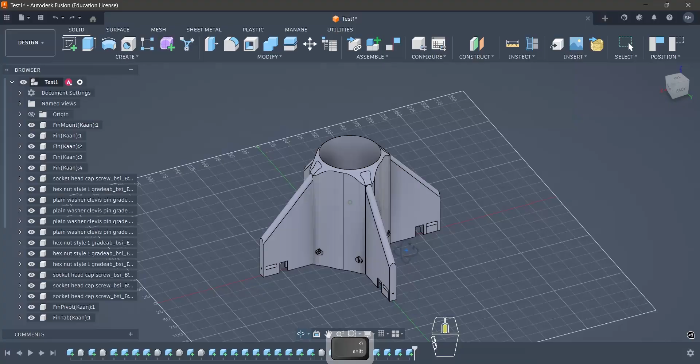Welcome to the first video in a beginner tutorial series where I cover how to design parts in Fusion 360 used for model rocketry. In this first video, I'll cover the basics of navigating around Fusion 360 by replicating the model fin can as shown below.

So this was originally made in SolidWorks and then imported into Fusion 360. There's lots of value in covering assembly from scratch, because this requires a lot of tools beyond extrude and revolve. I'll also include my keystrokes to show the use of hotkeys, which greatly speed up the CAD process, and I highly encourage everyone to learn it.

So this fin can has detachable fins with a dovetail slot, and at the rear these M4 bolts hold the fin can. The fin tabs also exist in the model, but we won't be modeling them. This is not a recommendation to build rocket fin cans this way. This is just a CAD piece used for education.

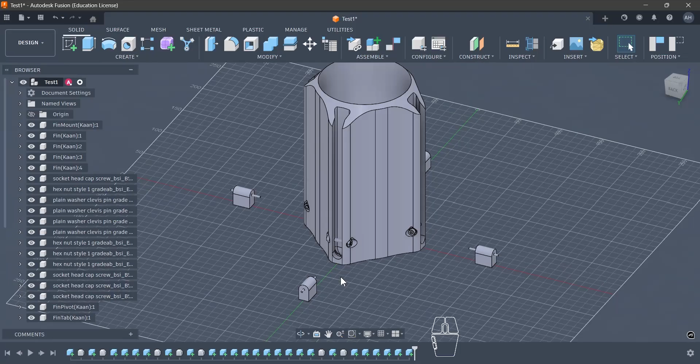So if you want to upload this to your own files, press File, Upload, and select Files, and you can click on the step file. I've already done that, so I won't be doing that again.

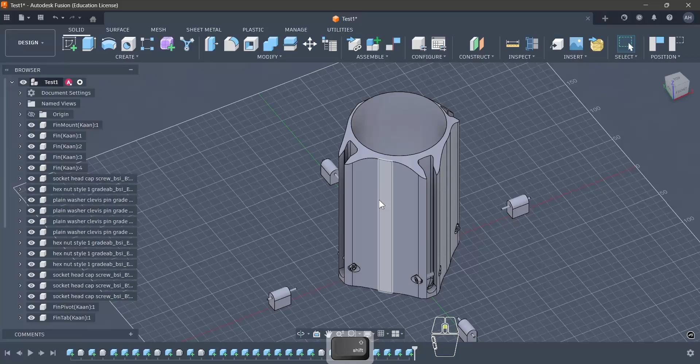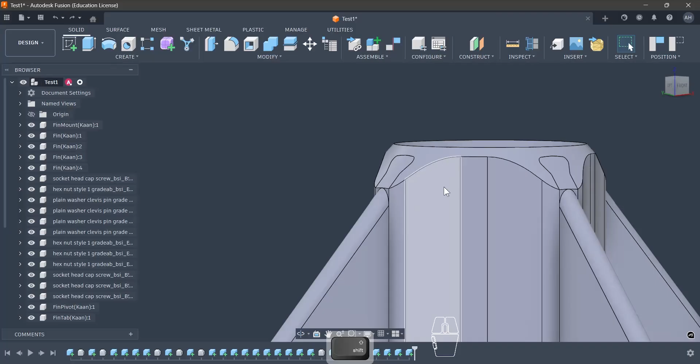So I believe that it's better to model the main part first, followed by the fins. So what are we seeing from this feature here? There's going to be mostly the same cross-section throughout, so the majority of this will come from an extrude, except for parts at the bottom, as seen here, as well as this top surface, which is a revolve cut all the way around the top, but it also needs to fit this shape of the fins. So how are we going to do that?

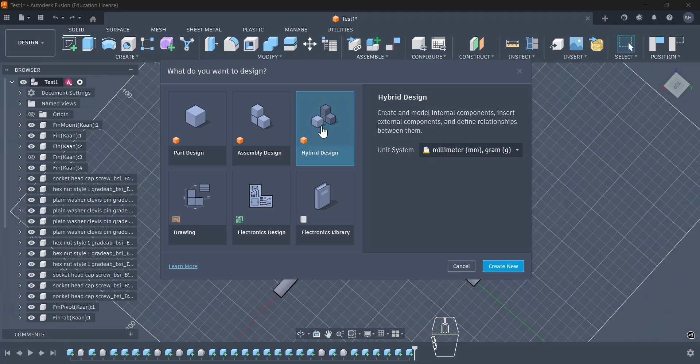So one of the things I'm going to do is first open up a new design, and this is where we create our new part. I'm going to click on hybrid design, which allows internal components and external components. This is basically the best of both worlds for part and assembly design, which is the traditional way, like in SolidWorks. I just recommend to use the hybrid design.

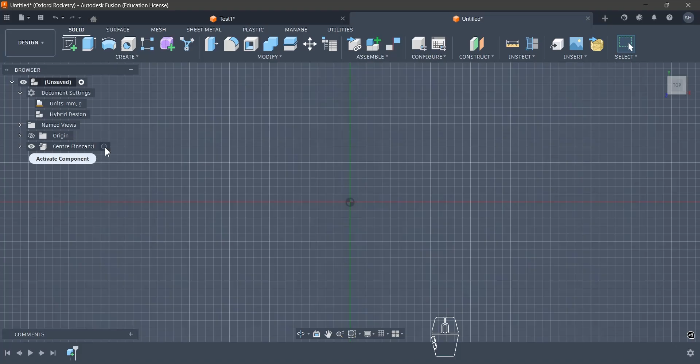If I create new, the top level is going to be here, and I can create a new component by pressing this and naming the part fin can, and I can toggle between the component versus the top level assembly just by clicking the dot next to it.

So the first step of detective work is to tell how the part was made and what the dimensions are. By looking at the part, I think that the part was created first with a hollow cylinder, that being the inner diameter and this being the outer diameter. Then this quadrant was made, and then the extrude cut.

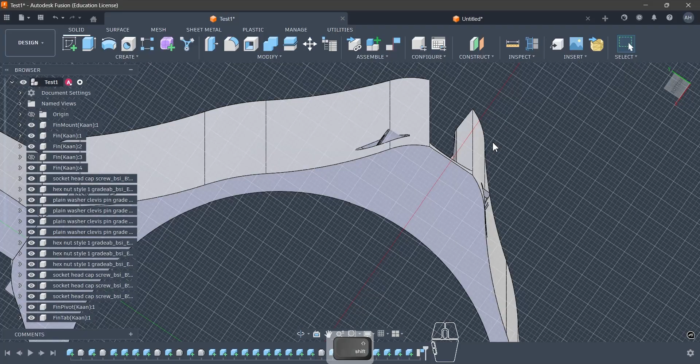So I'm going to create a sketch in this reference part just so that I can get the measurements. Press the vertex and the diameter is on the edge on the bottom right. You can also press I, and that brings up the measurement tool, which will tell you more info. Finally, you can press P, which is the project tool, to select the vertex, and that will project whatever line onto the plane with which you're drawing.

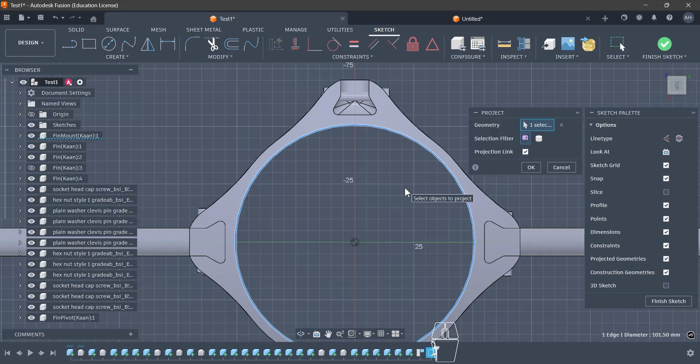With that, you can press D for dimension and create a driven dimension, so that will tell you exactly what it is. I'm going to do that for the outer edge as well. It's 55. I'm going to draw two circles based on that. In fact, I'm not going to need to draw a circle for the inner one because the project tool already creates a line.

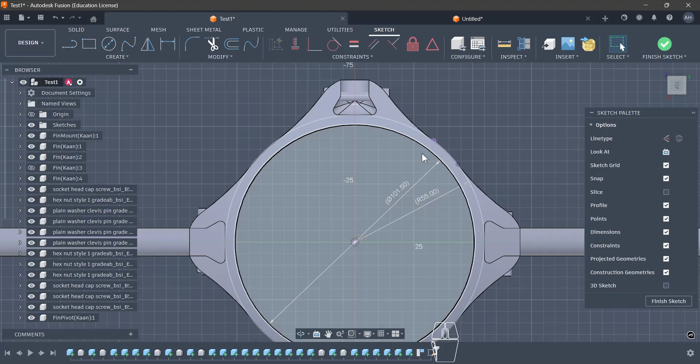For this line here, I've selected it, but it says the length is 32.283; it doesn't give the radius. That's because if I look at it in 3D, it's not a planar measurement. If I was to click down here, it would give the radius, or if I was to click the surface. To get this curve, I can also use the project tool again, and that will generate a circle which I can make coincident to both lines.

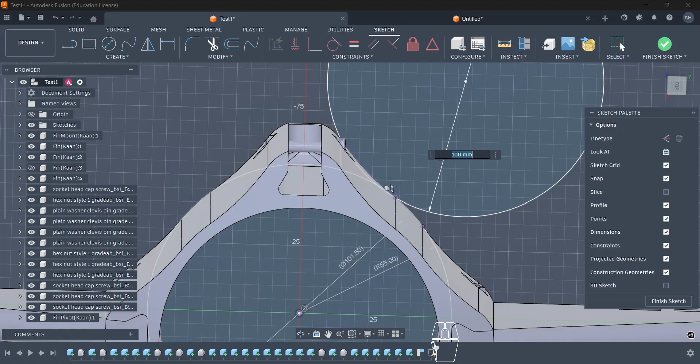There are lots of ways to do this, of course, and this diameter is 100, so I will define this as 100. In fact, it's a radius, so it needs to be 200.

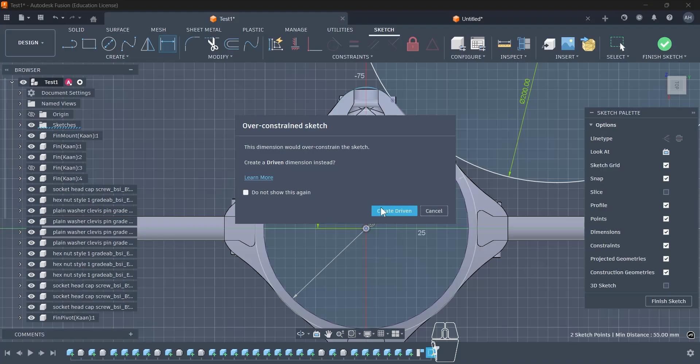For this top curve here, I'm going to draw a circle and then try to approximate it as best as I can. So I'm going to move that here, and it turns out that this looks pretty accurate. So this circle is then defined by 55 millimeters above the midpoint and with a diameter of about 32.5.

That's quite close. So with all of these, we can go back to the part and start making the quadrants. I'm going to begin with the two circles. Once again, this is 101.5, and the outer one I can do 55 multiplied by 2 to save me from doing maths. Then I can draw, in fact I can probably use my arc tool, which is more suitable,

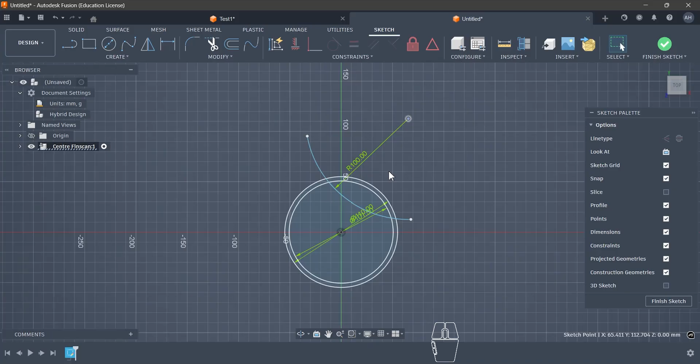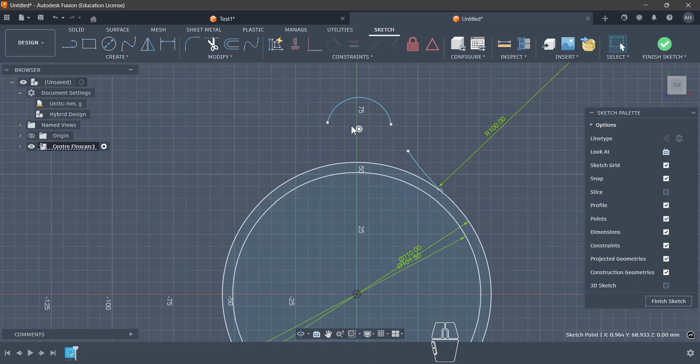and I can define that to be 100 and move the center point far away, and then define this point to be coincident and this curve being tangent. Next, I'll make that midline arc. And this is vertical constraint over the middle, so 16.3. And these two edges are coincident and tangent as well.

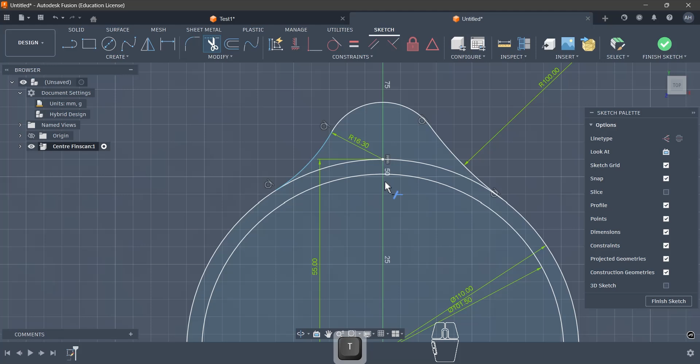I'm going to do one more arc on the left side. As you can see here, it's automatically entered the tangent constraint, but always be aware what constraints are automatically being applied because you don't want to get caught out. And the final dimension to define this is distance of 55, which is fine. You can press T for trim and cut that out for the correct shape.

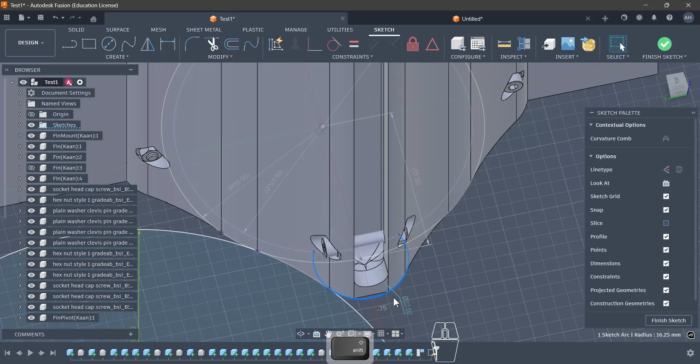This dimension isn't defined yet, so we can actually select these two equal, and that will set it correct. Now I will proceed to use the rectangular pattern. In fact, before I do that, I'm just going to take another look at the part, and yes, this surface is in fact flat, with the bottom length being distance of 12 millimeters. So the one other thing I needed to do is to go here, define this as 12,

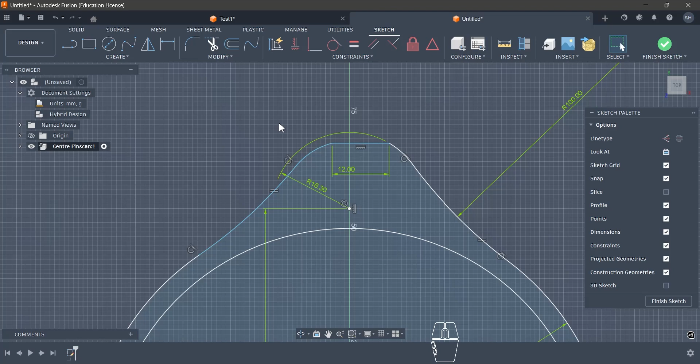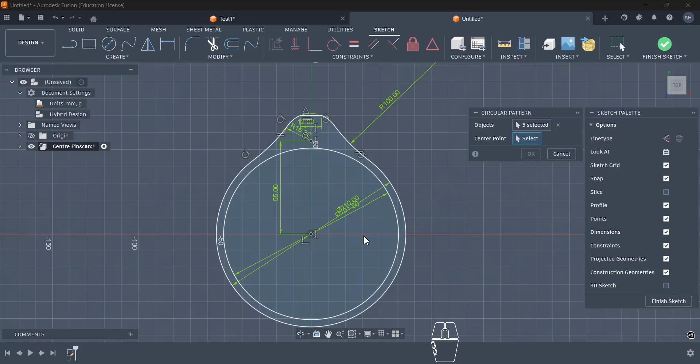and then take the trim off of the top part. It's destroyed some constraints, but that's okay. We can create the constraints again. We can create the line to here. I'm going to click this line, press X to make it a center line, and that will make it vertical, and that is all constrained. I'm going to use the circular pattern to select these objects, 1, 2, 3, 4, 5, around the center point. I want 4 of them, and then I'm going to press tick.

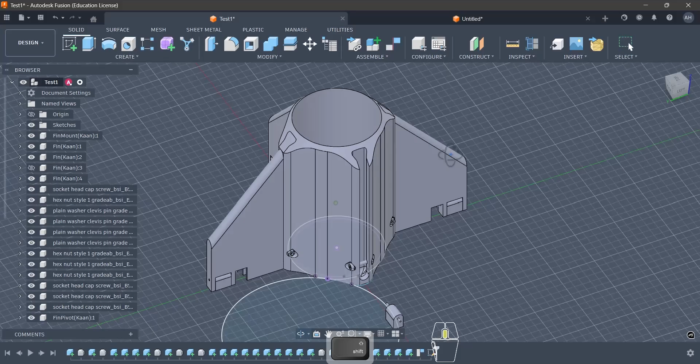I'm going to need to trim the rest of these. Even though I've trimmed those lines, everything's still white, so it says it's fully constrained still. I'm going to finish sketch, find the dimension of my extrude. I'm going to go back into the part and select this line and shift select this line, and the bottom right tells me the minimum distance between these two lines is 200, and so that's going to be my extrude. So E for extrude, and then 200.

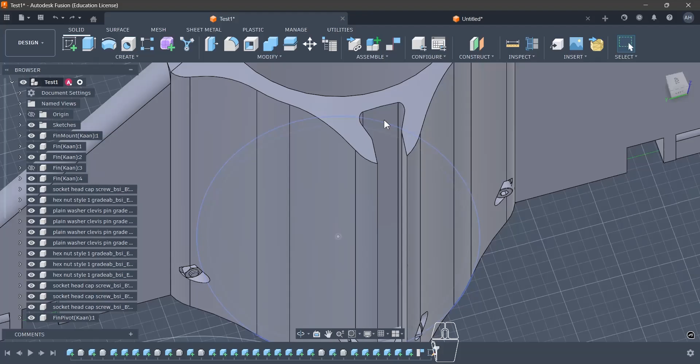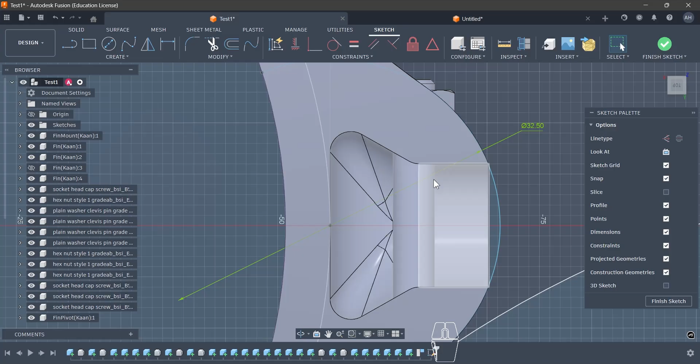So going back to our reference part, you can check out how the extrude cut was done on this profile. So what it looks like is that there is a trapezium shape that was cut out, and then those are simply just fillets. So you can go back into the sketch and look for the dimensions. So if it's a trapezium, we only really need to know the angle and the height of the trapezium, and we already know this width here being 12.

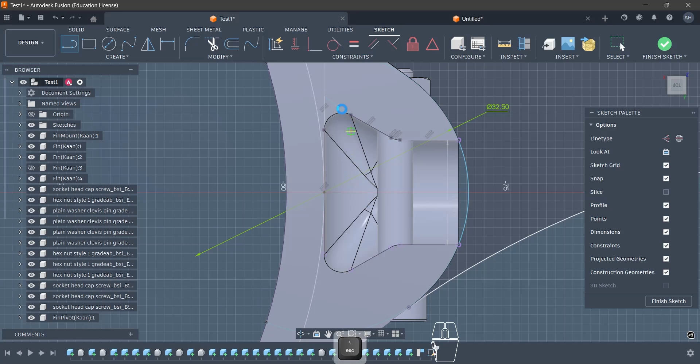I'm going to project this line, and then I will proceed to just extend these out a little bit such that I can get rid of the effects of the fillets I'm measuring. I'm going to make that parallel. And then finally for the dimensions, I can select this. So it turns out this is 8 and the angle is 60. So that's all we need.

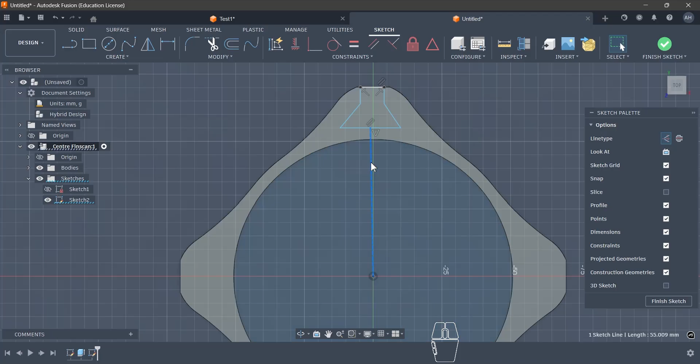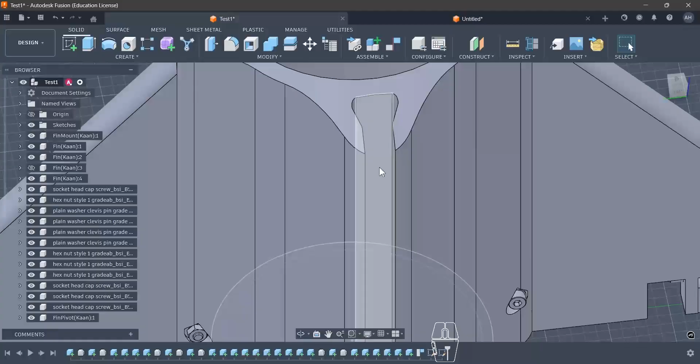And we already know that this point is 55 mm from the center. The distance from the bottom to the bottom of the slot is 6 millimeters. So I'm going to leave an offset of 6 for when I extrude. Returning to this, I'm going to create a sketch on the top plane here, and I'm going to create my trapezium. That's a very nice constraint, and then we can figure out the size of all of the fillets. So if I click on this, radius 2, and then if I click on this, it's also radius 2. Easy.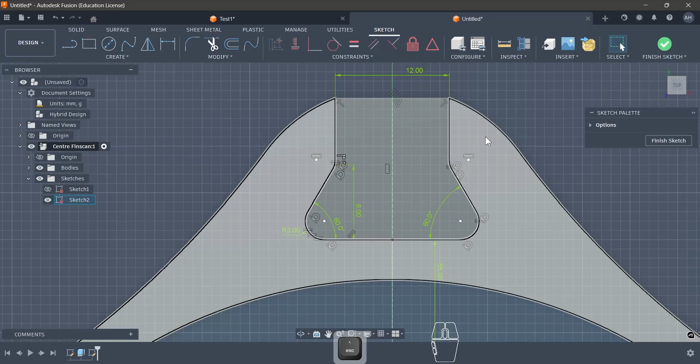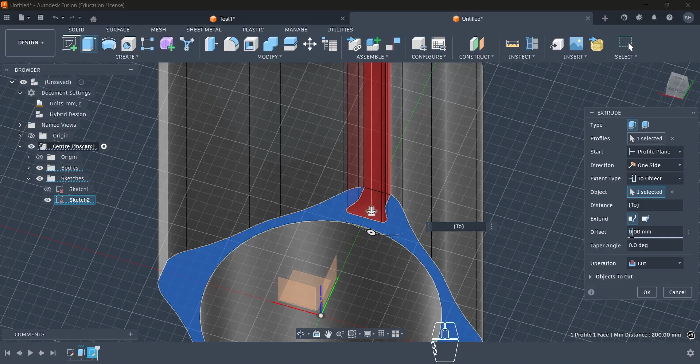Good, and I'm going to extrude cut this all the way down, direction one side, and then extend type I'm going to change to object, and I'm going to choose to this face and having an offset of 6 millimeters, and I can see that it needs to be negative 6 millimeters. Tick, and good. That's exactly what we wanted.

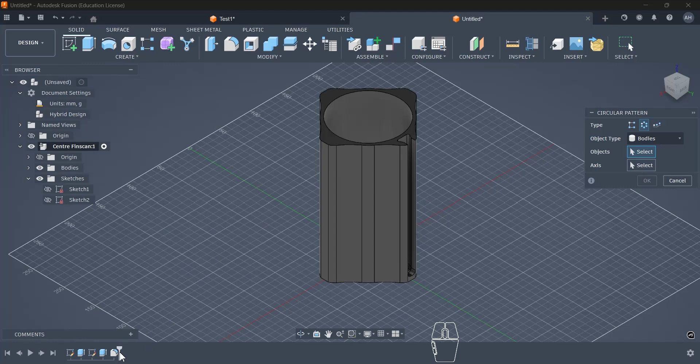I'm going to press F for fillet and then set this to 5. It's not exactly the same, but it's good enough. And then we can use the pattern tool to repeat the same feature many times over. I'm going to select features, selecting the extrude and the fillet. For the axis, open up the origins tab and then select the Z axis. Quantity of 4, and I'm going to press tick, and that's all computed nicely.

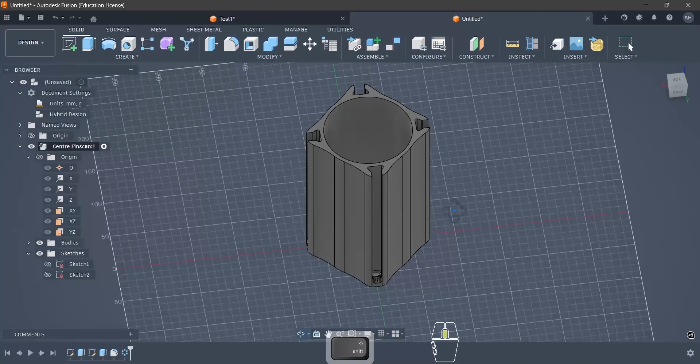So if we want to do the revolve cut, let's first define a sketch. I'm going to use the project tool on the top line here and define the triangle as so.

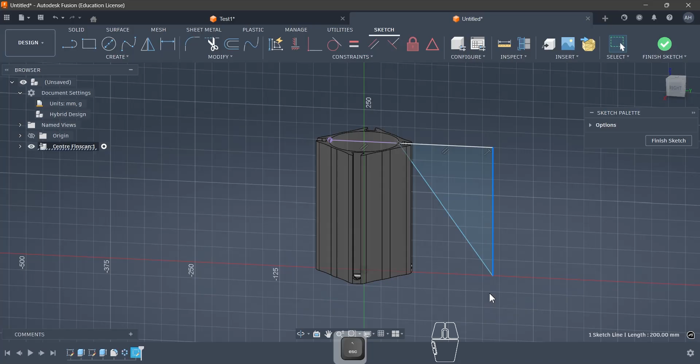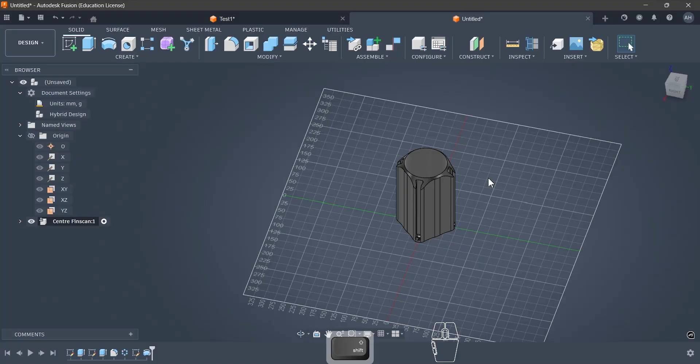I'm going to press tick, click revolve, profile selected, and for the axis I'm going to select the Z axis and press tick, and that looks good. So for now, that is our center fin can, and at this point I recommend you save the file. I'm going to call this Fincan Replica, save, and now we can move on to the fins.

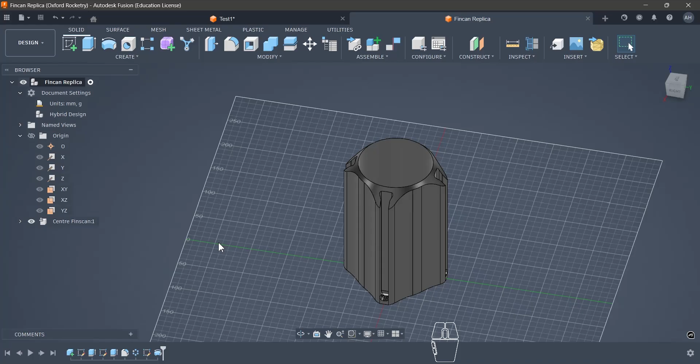So to toggle back into the assembly mode, you can click this circle, and of course nothing looks any different because we've only got one part. You can right click, press new component, and then parent from parent, which is the whole assembly, press tick, and now we're in component 2. I'm going to name this fin, and with this shadowy figure we can't affect it, but we can use dimensions from it.

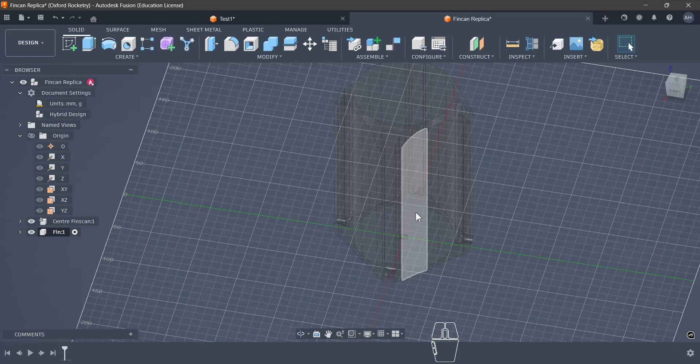So what we can do is, given how this is constructed, I'm going to create the base of this with extrude and then the rest of this with a loft. So I'm going to start a sketch on this surface here, and rather conveniently I can also use the project tool again to obtain what I need from these. Tick, close off the surface, and I have this.

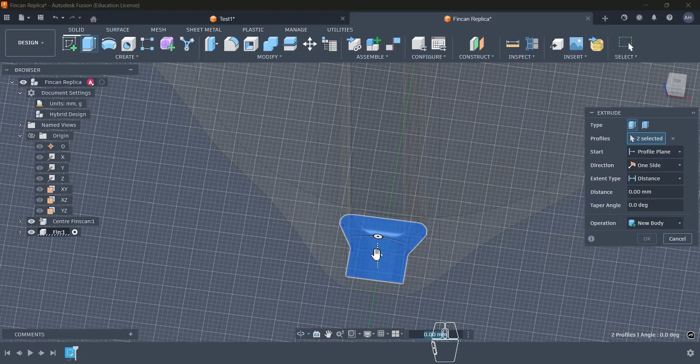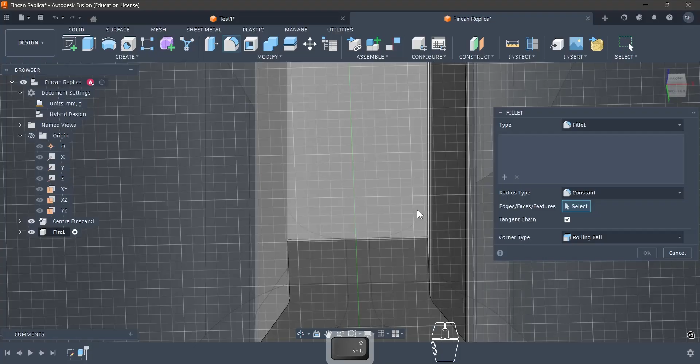I'm going to extrude this upwards all the way to the top of 200. Actually, it's going to be 200 minus 6, so let's do 194. Doesn't matter in the end too much because it's going to get cut. Now I'm going to put the fillet on the bottom to correspond with the same fillet that's on the inner there, so I can do 5.15.

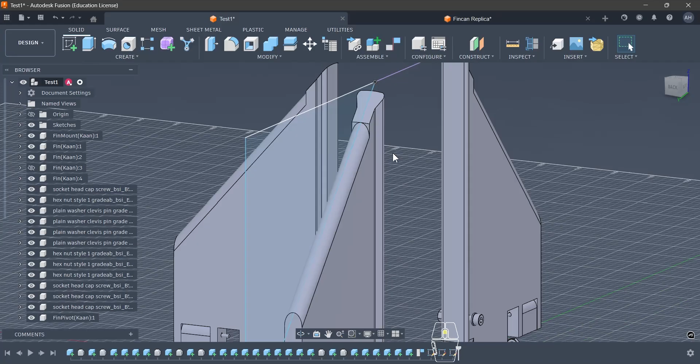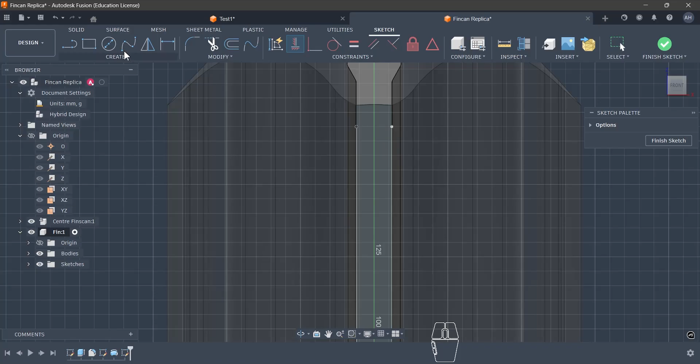So since this surface is flat, this will be one of my first faces to use the loft. I'm going to create the sketch here. And going back to the profile, essentially it's close enough to a circle on top and the rectangle stretching all the way to the bottom. So I'm going to use a midpoint line at the origin point and define this as 12. And I'm going to draw a line all the way up and all the way down. Let's make this vertical. And let's create a circle that's tangent to both of these.

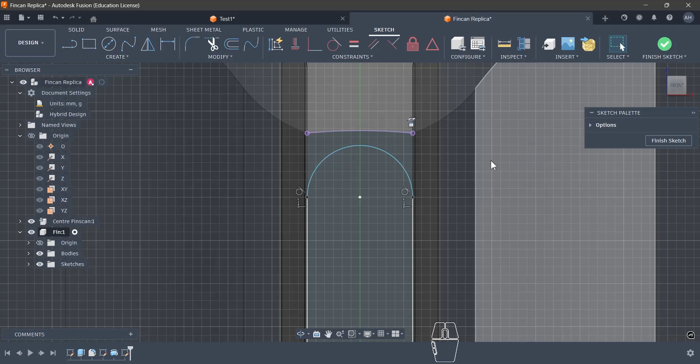I'm going to trim the bottom half away and make this tangent. I would like the top of this to be tangent with this curve rather. So I'm going to project it, geometry, line. Good. And though I'm shift selecting both of them, for some reason the constraints are unavailable for tangent, so I'm going to just do a workaround where I'm going to just do something like this.

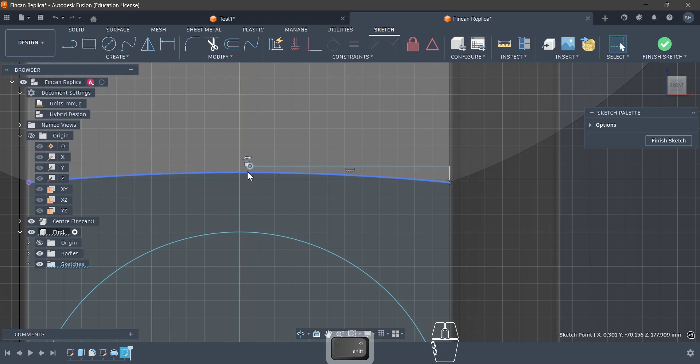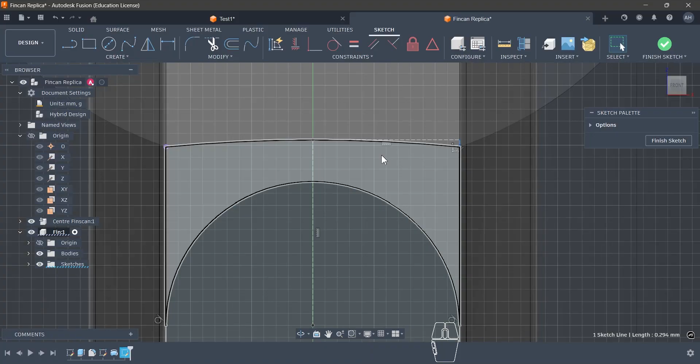I'm going to set that horizontal, make this coincident, and have a line that goes from here to here, being vertical. And I'm going to make all of these center lines instead of solid lines, and I'll make this tangent. And that's good because it's fully defined. I'm going to press tick.

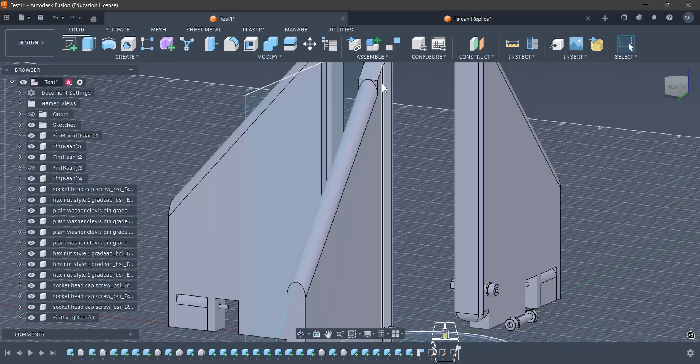Now for the second surface, there needs to be a particular offset plane on which I can draw the second profile. So the distance for that is going to be from this to this, which is 90.62. So I'm going to do just that. Construct here, 90.62. And this is the plane on which I'm going to draw my other sketch.

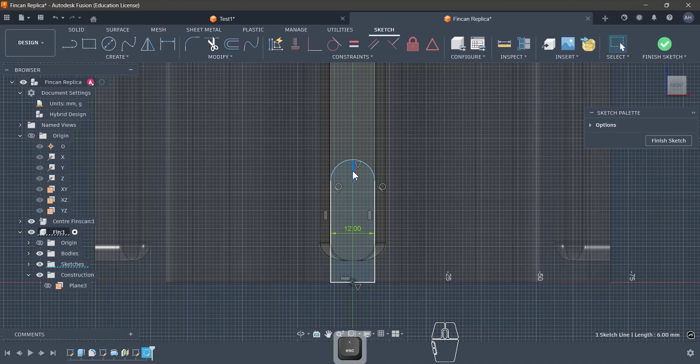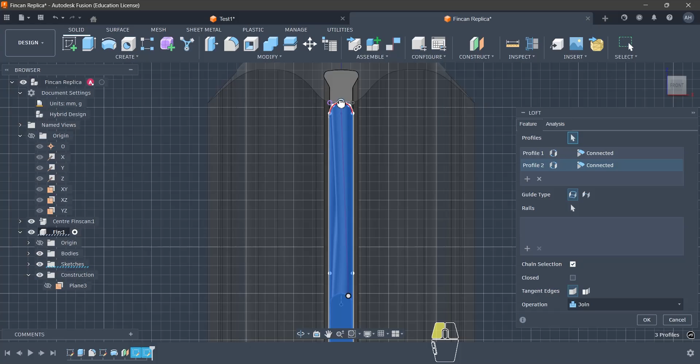Able to go into the loft tool, where I can select the surface, all of it, and the profile too. So that's all very good. And the loft tool has this circle here, which is sort of related to where it is lofting from. So I'm just going to drag that to the middle and drag this also to the middle. And I'm going to keep. This essentially just gives a very nice smooth line. Apparently not.

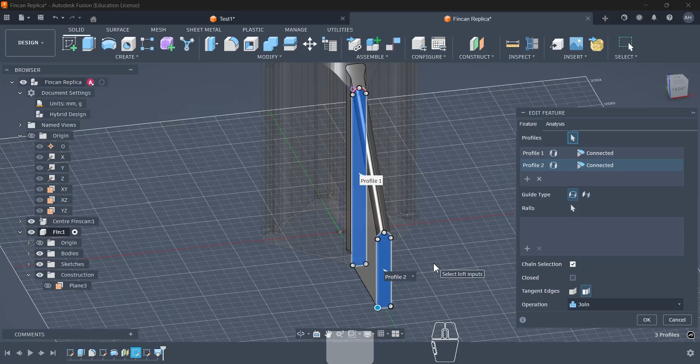Is that good? Yeah, that's good. Yeah, I'm not really sure what's up with that loft. I guess don't play around with the loft inputs too much.

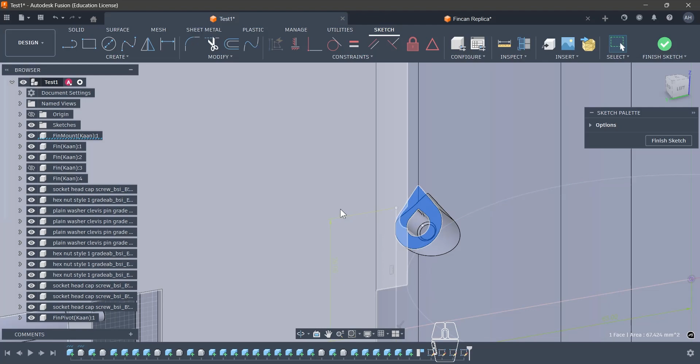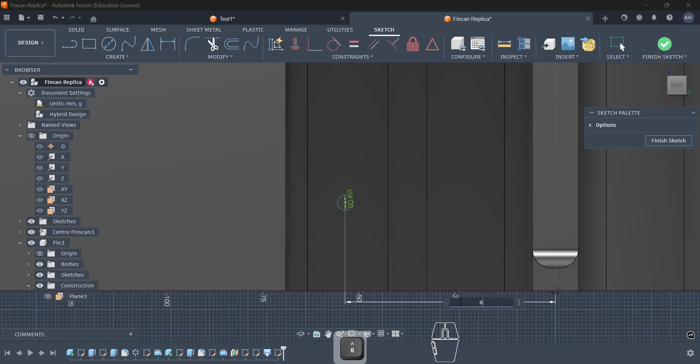So the next thing we'll do is the holes. So there's going to be a hole that runs through both the fin and the fin can, as well as this portion here, which is the fin can only. We're going to do the sketch here, the surface, and as I've measured earlier, the center of this hole is 26 up and 63 to the side, so I'm going to quickly do that. This is an M4 hole, and so this is going to be 63 to the side, and it was 26 up.

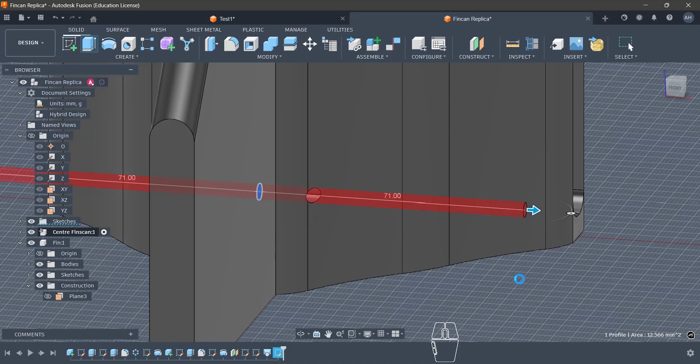I'm going to cut extrude, and in this particular case, it's going to cut through both of them. I'm going to open the drop down and it says clearly that it can cut both of them, which is fine. Okay, for the next part, this little cut section here is specifically for the fin cans, so I'm going to go into the center fin can, and I'm going to make an offset from the center. So this is offset from the center of 10 millimeters.

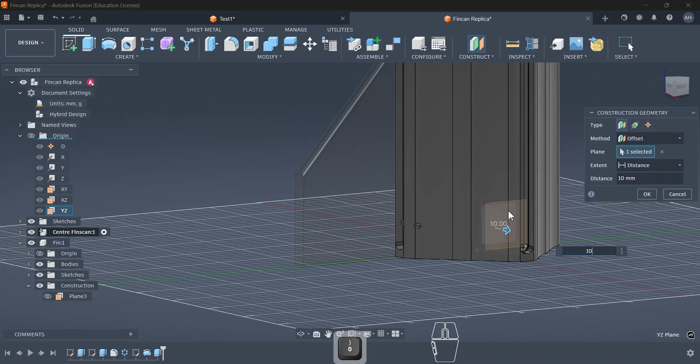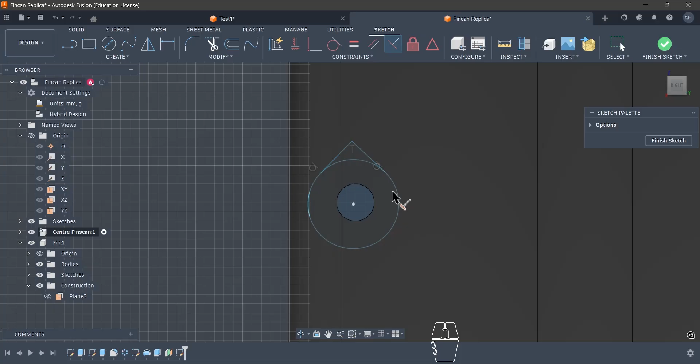In this sketch, I'm going to use the same hole, and I'm going to emulate this teardrop shape. The reason for this is for 3D printing, so it helps with alleviating the overhangs. So we're just going to quickly do that. Set this to be tangent, and I'm going to set perpendicular to here. I'm going to set the project to give me a circle.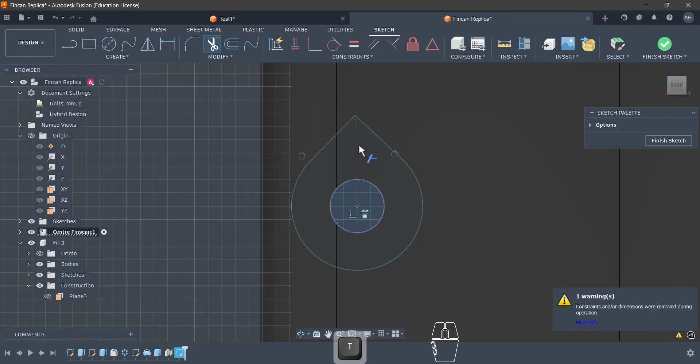I can make my circle coincident too. So I'm going to make that coincident. I'm going to define this. Well, first I'm going to trim, and then I'm going to define. This is 5, and then I'm going to make sure that the top of this is vertical. That fully constrains it, and that looks good. I'm going to cut this, and that cuts perfectly fine.

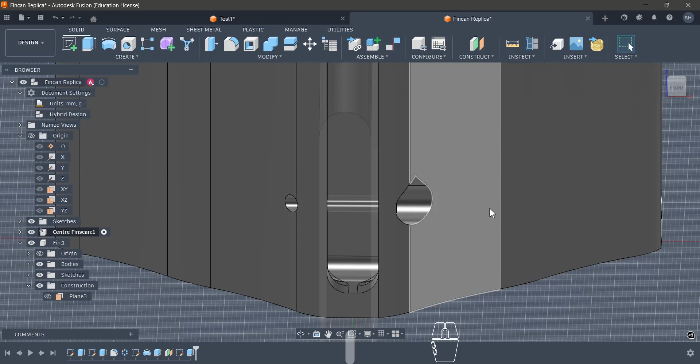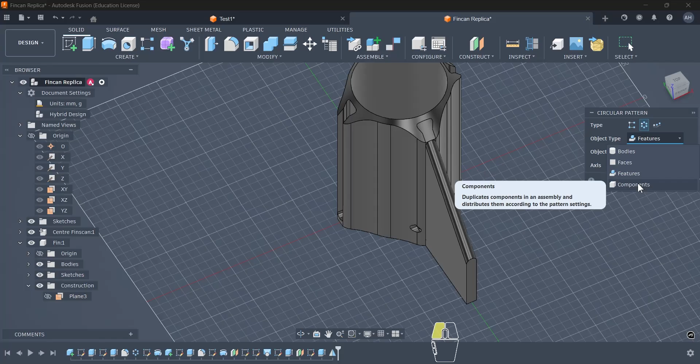I'm going to mirror this across onto the other side. So mirror, and mirror the features, and the plane being this one. Now what we can actually do is to use the circular pattern and apply the components to everything here. So axes, do here, I'm going to press tick, and it's also possible to apply, going back to the fin can here, it's possible to apply a circular pattern to all of the features that were just done again.

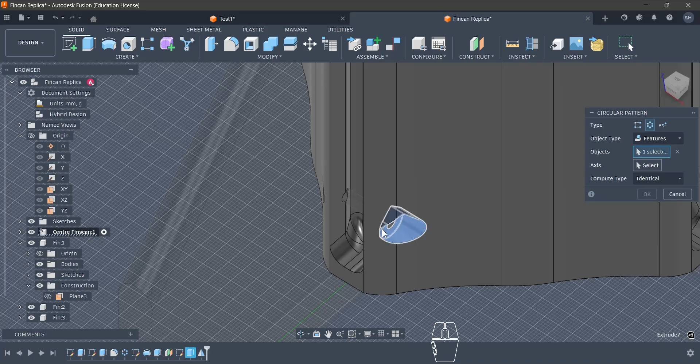So features, features, and axis being the z-axis. So we all know that that works. For now, I'm going to just suppress those. I'm going to suppress features.

So what we're going to do now is to insert a nut and a bolt. So under Insert, go to Insert McMaster-Carr Component, and under this menu, you have components for virtually every single type of screws, bolts, nuts that you would ever need. What we want to look for is screws and bolts. We want a socket head screw. We're using metric, and we want an M4 bolt. And we want to find this length of 25.

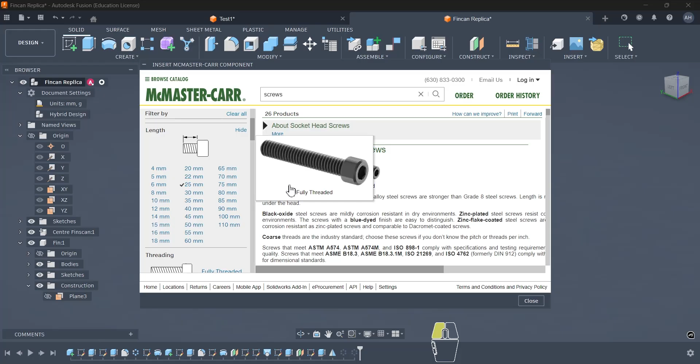We'd like fully threaded, and under these options it gives you what CAD files they have. So under this blue link, you can click this, and download now gives you the part to insert directly in. So under the drop down you've got different options. You've got 3D STEP, no threads. For now we're going to import in 3D STEP, which is going to include the CAD of the whole part with the threads. In the future for FEA I would recommend importing in no threads, because having the thread is for visual demonstrations but complicates the geometry during meshing.

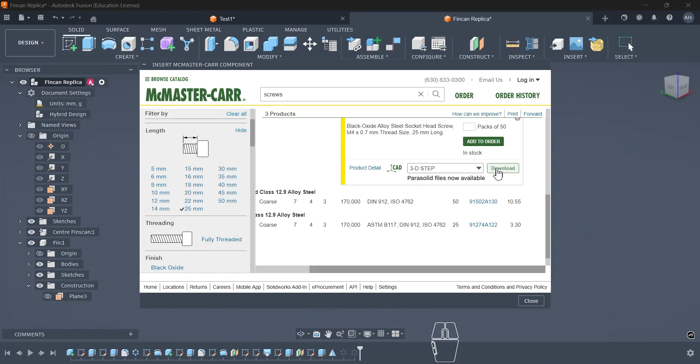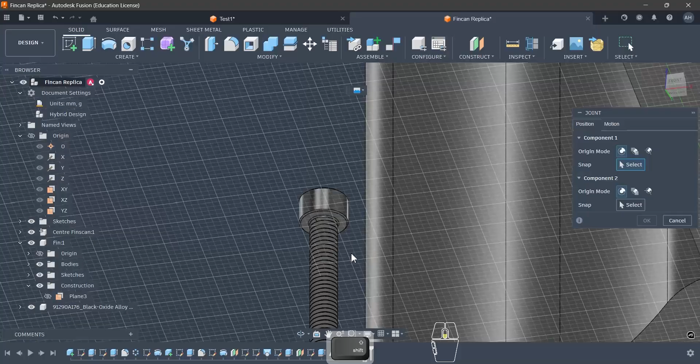I'm going to click download, and that will bring the component in after a few seconds. There we go. So I'm just going to move that a little bit. And we're going to move this around as if it was an assembly. So I'm going to press J for joints, and I want this surface to match up with this surface, but also I want the centers to match up. And it's possible to do this in one go.

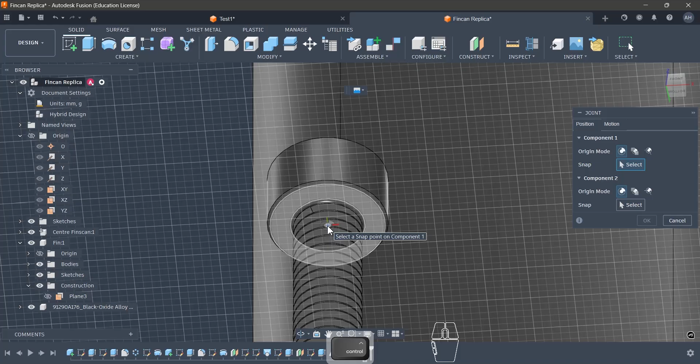So you essentially need to select the cross that is in the middle there, but it disappears if you try to hover over it. So you need to hold Control, and then that allows you to move the cursor to press it. Then you need to go on to the other surface, and likewise hold Control, click that, and in just 2 clicks you've got the joint created.

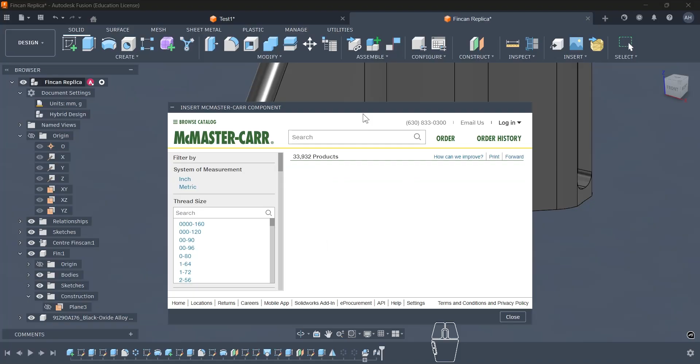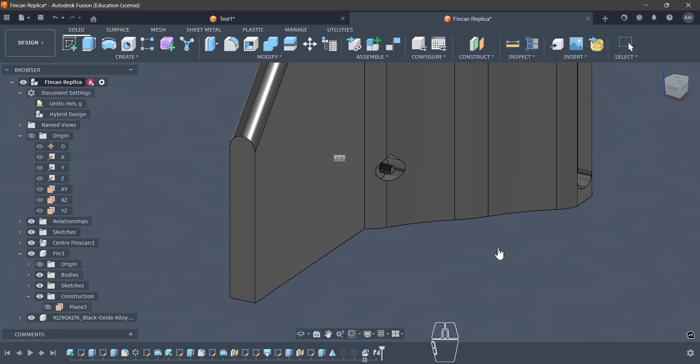Next, insert the nuts. So we're going to again insert McMaster-Carr component. Under nuts, we're going to go under lock nuts, because we always want nylock insert. So we're going to search metric again. We want M4, and high strength steel is a very regular sort of lock nut. So we're going to once again go in 3D STEP. I'm going to click download. That's going to bring in the component.

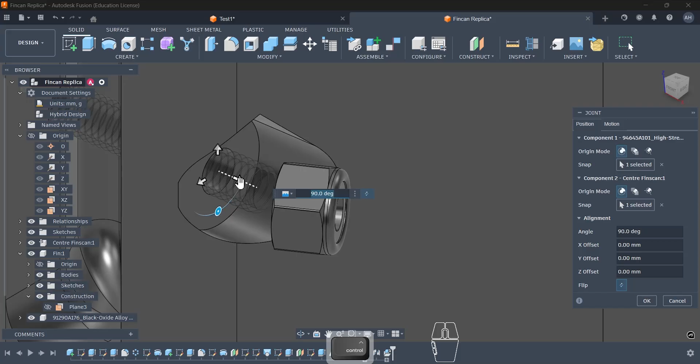Press tick. I'm going to zoom in, J, and that's the back, and that's going to be the front. And we're just going to put that there. Good. So now to bring the whole CAD back, we're going to unsuppress the features of these, and if we really want, we can also do a circular pattern on the components that we've just created. So we can do that for the nuts and bolts around the axis here. 4 copies, tick.

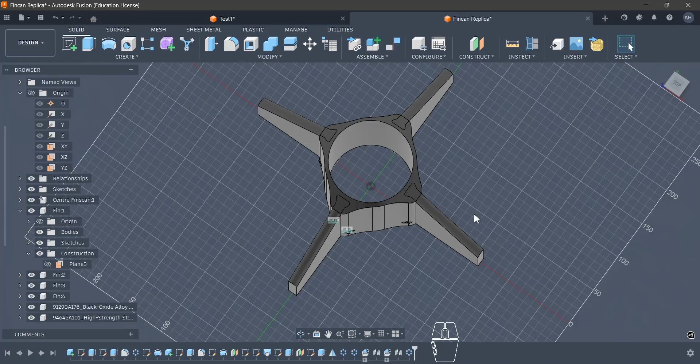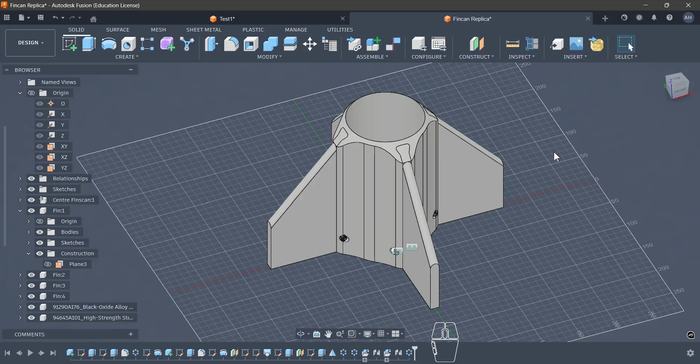And that's essentially the part complete. So one final thing we can do is to add material. Under Modify, find Physical Material, and we can scroll down to the plastic section. There's no specific option for PLA plastic, so we're just going to use some generic plastic like ABS, and click and drop to add the material. Close. That sets the mass and sets up the CAD for an FEA simulation.